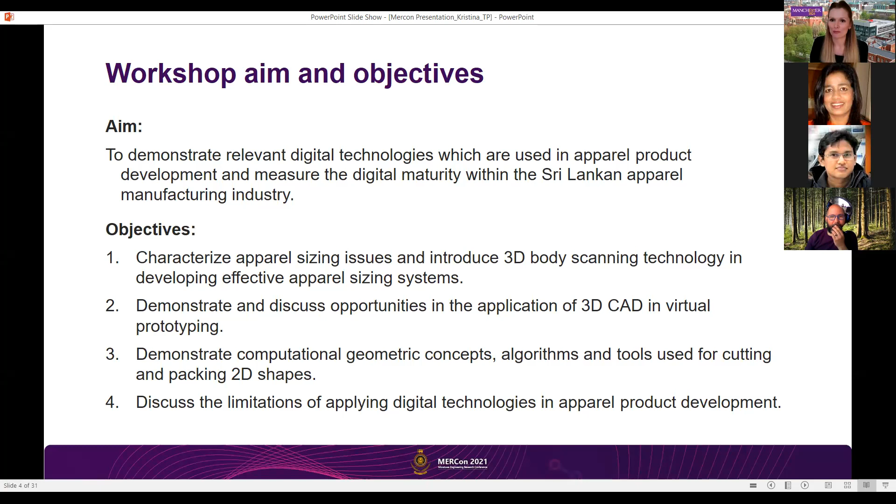So looking at the sizing and body scan, prototyping to be covered by Jayamali, and then also the computational geometric concepts, algorithms and tools for cutting and packing, which is based on Dr. Ranga's research. And finally, the limitations and the opportunities that I'll be looking at.

So as I said, this is a workshop. We don't just want to talk at you, we want to get your input as well. So we'll be using Turning Point throughout this workshop to run some polls and get some ideas from you. So if you'd like to take a moment, I will actually put this in the chat now as well. So you can either access it via your mobile or a browser, and then type in the session ID, which is MERcon 21. So there's no need to create an account, and your responses will be anonymous. So if you'd like to join the session now, then we can maybe start our first question to just make sure that the poll actually works, and to get to know who's joined us today here in the session.

So if you've managed to join the site, so the session ID is MERcon 21, and I've got it on here again, the website. So you should be able to see on your device now this question popping up. So if you just could tell us who you are. Are you an undergraduate or postgraduate taught student, a research student, academic, or professional from the apparel or textile industry, or maybe from a different industry? If you could just pop in your response now, that would be great. If you've got any problems with accessing the poll tool, let me know.

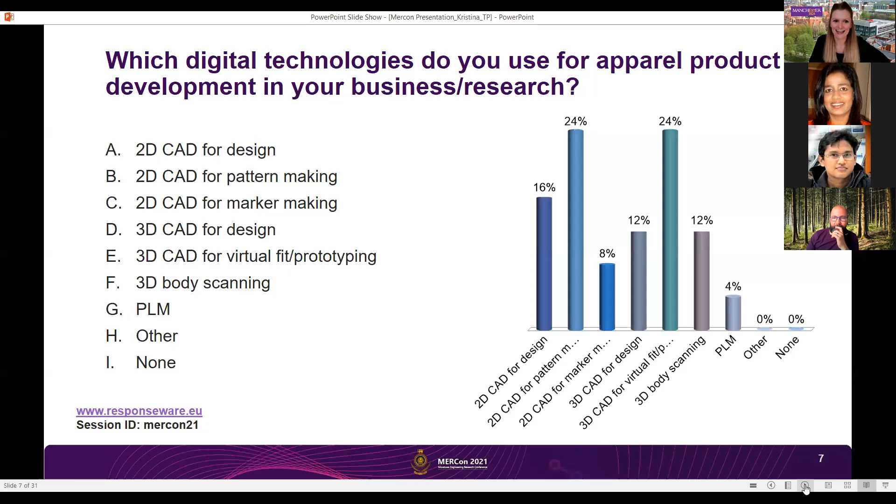So we've got B's and C's quite a lot, which means 2D CAD for pattern making and 2D CAD for marker making is used quite a lot. But let's see what we've got on the poll. Okay, yeah, so we've got 2D CAD for pattern making and 3D CAD for virtual fit and prototyping. That's great, because we'll be covering that today, and especially Jayamali will obviously be covering the 3D CAD for virtual fit and prototyping. So that'll be interesting to hear your thoughts on that as well. Okay, that's great for a start. Good to have a bit of information about you and your backgrounds.

And we've got a final question here, which is, what is the greatest benefit of the digital technologies that you apply in your business? What would that be? You can type that into the app or into the poll if you've joined the poll.

We have a couple of responses in the chat as well. So it reduces the lead time, customer satisfaction, time saving, avoid sample making time, reduce time consuming, reduce lead time, cost, but yeah, it's lead time and cost. Okay. So it's a lot about time saving, yeah.

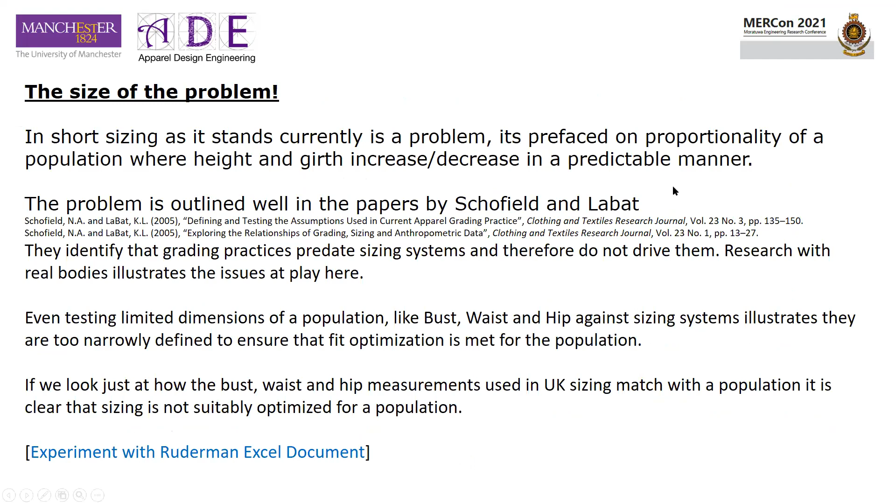So in terms of technology, which we're here to talk about, harnessing technology to better develop body-worn products requires we lead the current practice to a state where it can be adopted and integrated. So what we see is lots of promise with technology, but then often quite difficult problems with actually engaging it. Sorry, I think I've moved forward a slide. There we go. And that's quite important, to try and find a way for people to engage in it effectively.

So in the past 50 years, we've kind of moved from individual production skills to mass manufacture, centralized skills in making body-worn products. And what that means is that lots of what used to be home-based skills and skills that were distributed through a population are now largely concentrated in the hands of a limited number of people making stuff. And I think that then brings with it certain problems, not least of all with access to technology. But technology does offer us a lot, ways to center the body in product development, access not afforded to those who would most benefit. So I think that's quite important, which is that we have this technology, but it's often very expensive and quite difficult.

And something we've done with apparel design engineering is try and reach out to people and allow them opportunities to access technology in a way that means they can have some connection with it. So as educators, we bridge the gap, but it requires more accessible means to engage the wider maker community, to embed skills and develop more suitable theories, to support the practice of making clothing. So we need some way of inverting it so that everybody has an opportunity to engage in some way with technology. And we see that a little bit more with some of the developments, mobile scanning, some of the applications that are coming are much more centered on greater accessibility for people, although there's a cost difficulty for people. But importantly, within the context of all of this, interdisciplinary work is essential for us to drive anything forward and for us to get any benefit from technology as well.

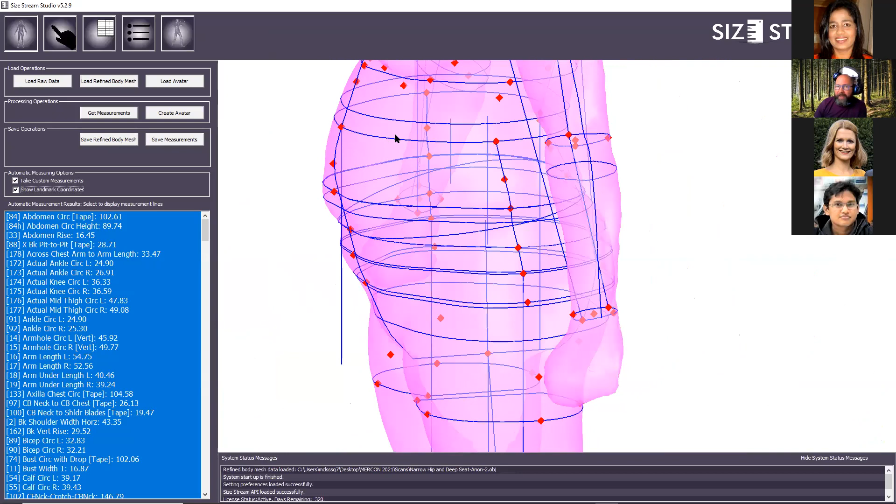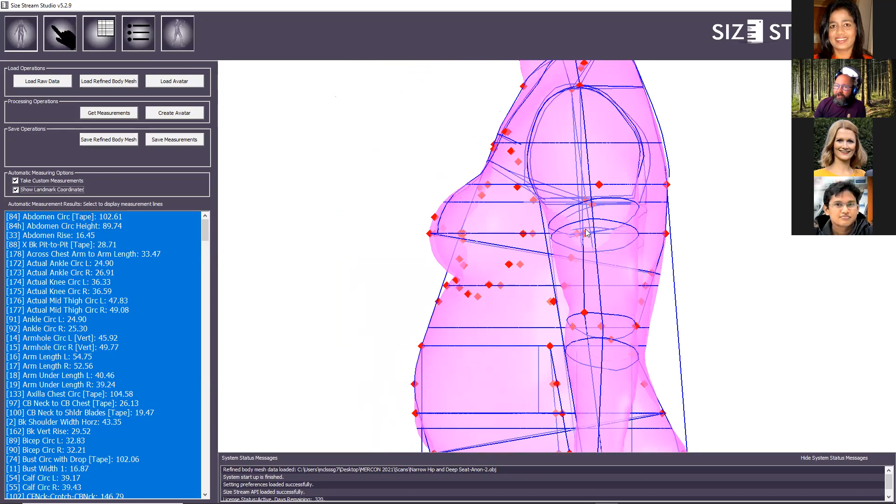So one of the things scanning technology will do is it lets us say, here's a circumference of the body. This is the waist circumference up here where my mouse cursor is. But it divides it. The scanner's saying this is a point that divides the arc of the front and the back. So what scanning does is it brings forward the time when we take a full dimension and distribute it. And similarly with the bust measurement, it says at the underarm point, this is the front arc of the bust and this is the back arc of the bust. And it lets us understand those things.

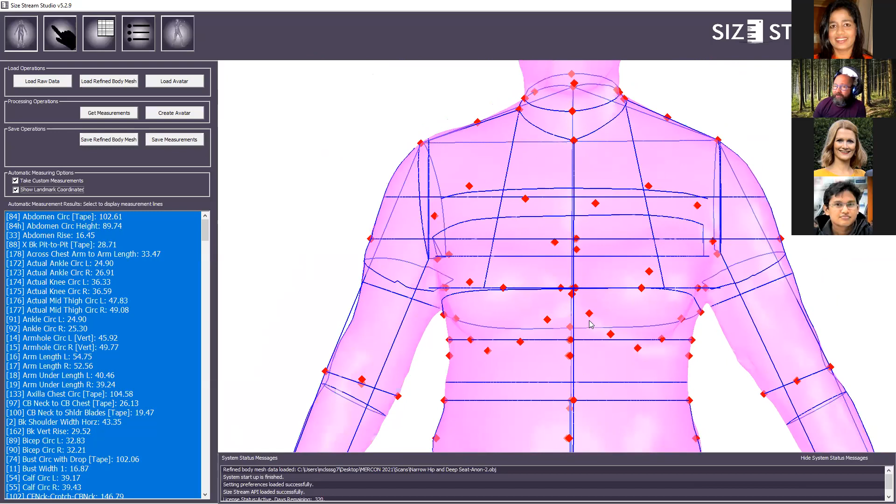But it also lets us look at depths through the body. And it's quite important. So we can look at the seat depth, the depth from the front to the back of the body at the area where, say, trousers fit. But we can also look at widths as well. And when you think about the process of manually taking measurements, it has huge advantages using scanning technology because we can extract so much more information, more than we ever could. But we need to start to understand the scan differently.

So if we look at this scan here, you can see there's a couple of points that represent the side neck. So I'm just going to make an adjustment as an illustration of some of the skills building you need to do with the software and some of the stuff we have to do with it as well. So I'm going to move the landmark for the side neck, largely because I want it to be in a position which I think is more appropriate. I think this is a little too far back.

When we're looking at the side neck, we're looking at a point where the trapezius muscle, this muscle at the top of your shoulder, comes into the column of the neck, and just forward of that intersects with sternocleidomastoid muscles, which run down the side of the neck into the top of the rib cage. But they create an angular change, but there are some quite important styling elements of this.

So when we look at it, we know that if this is the shoulder point, then we want a gradual slope back. So we know this side neck point probably wants to be about here from the perspective of a garment, but also from the perspective of the musculature of the body and what forms the side neck and creates this change. So we can actually move it in this environment, but we're having to develop a new skill of looking at this 3D body surface and then saying, well, what and where should these points be?

And we can move both the left and the right neck points to positions we think are more suitable, and then we can store and process. So apart from the fact I can't change the physicality of this body in this environment, I can change how I analyze it, and I can take more measurements and different measurements. So scanning opens up this possibility to really explore bodies in a much more effective way.

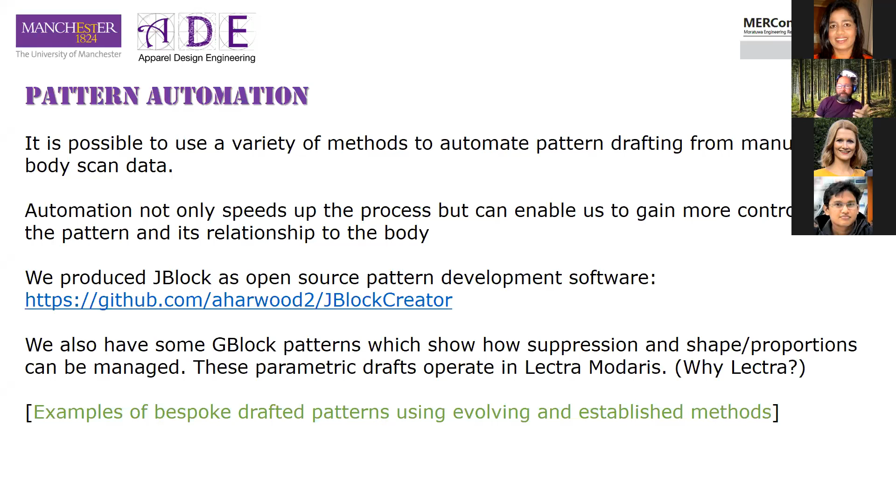We don't need to develop things specifically for an endpoint. We can utilize things that exist. And I think that's incredibly important to make technology work. Let's leverage what's there before we look to develop things to replace it. So in the context of pattern automation, I looked at two individual people for this. It's about 3 hours work getting here. So I have two people here.

One of them has a narrow hip side to side, but a deep seat front to back. And the other has a wide hip side to side relatively, but a shallow seat front to back. Key in these two individuals is they have a very similar circumferential measurement of the hip. One of them measures 101 centimeters, one of them measures 103. In the context of sizing, they're the same hip size for all intents and purposes of how sizing operates. But we can use pattern automation to create a block for them.

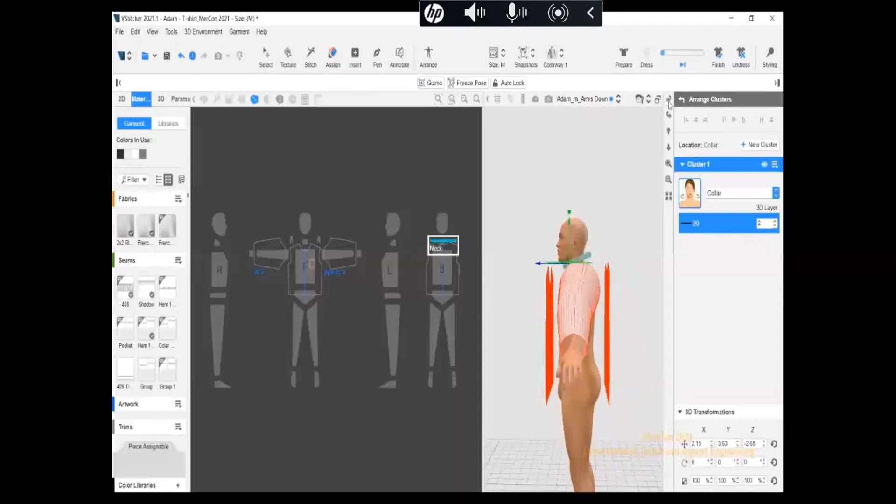Then use the main toolbar to switch to stitch the garments to the required assembly construction. Let's start stitching. We can stitch the shoulder seam and then the side seam to the side seam. The other side is automatically stitched because these pattern pieces are symmetrical.

Then let's stitch the underarm sleeve and use the multi-stitch feature to stitch the armhole and the neckline curve. Start stitching the front and back of the t-shirt to the armhole curve, then press done. Then let's start stitching the neckband using the multi-stitch feature.

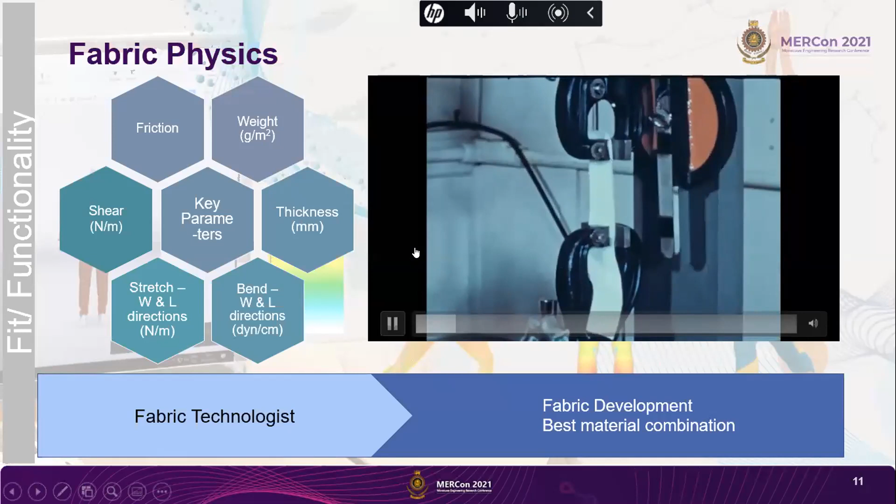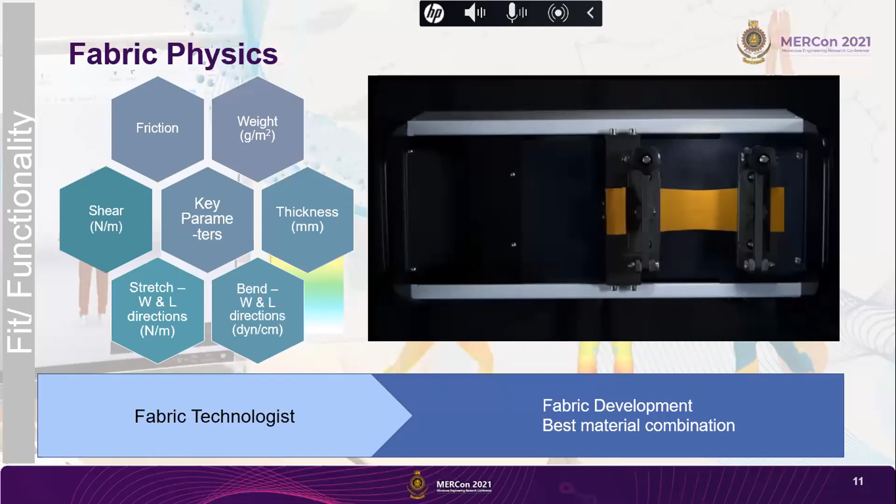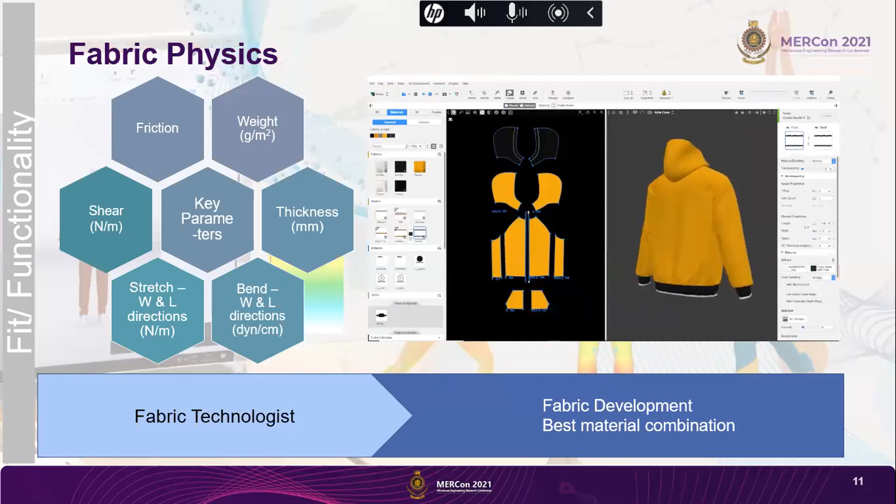We're saying goodbye to manual fabric analysis and complicated data entry, and hello to the digital age with the Fabric Analyzer by Browzwear. The Fabric Analyzer identifies the thickness, stretch, and bend properties of any fabric for visualizing garments. Simply place your fabric on the machine and retrieve the data as you work. Once analyzed, the property values can be automatically loaded into 3D software programs like V-Stitcher for true-to-life 3D simulation of any pattern with any fabric. For more information or to schedule a demo, visit us online at browzwear.com.

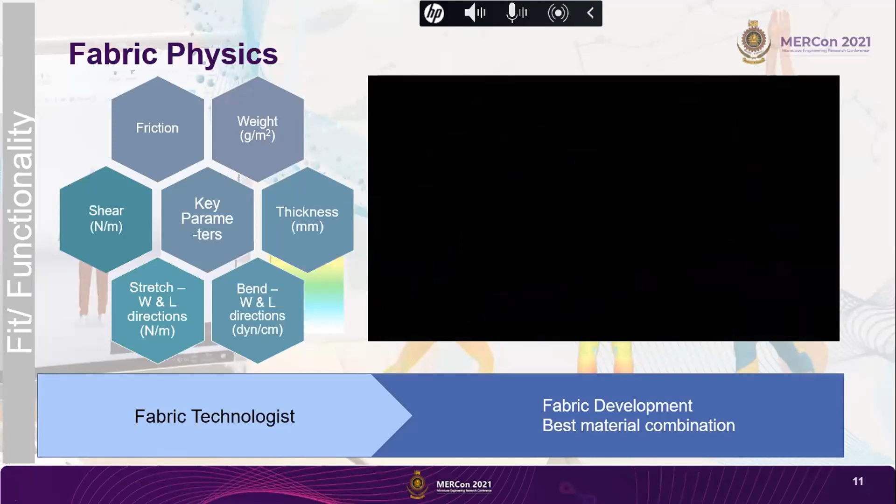Let's discuss these fabric parameters one by one using the next slide. Mass of the material: the mass of the fabric measured in grams per square meter. If we have the fabric analyzer tool, then we can directly import these measurements to the 3D CAD system, or else we have the fabric library inbuilt with the 3D CAD tool, so we can get those materials from the 3D software.

Coefficient of friction measures the amount the fabric resists sliding on the avatar. The lower that value, the easier it is for the fabric to slide on the virtual avatar. The higher the value, the more the fabric will hold its position. We need to know these parameters when we do sportswear manufacturing, for the bottom band and the shoulder straps and all. When we map the real material characteristics, we have to have an accurate idea of these fabric parameters.

Let's see the thickness of the fabric in millimeters; we're supposed to input it here. Then the bending rigidity, that means the stiffness of the material, measured in dynes per centimeter along with the width and the length. The lower the value, the less stiff the material. The higher the value, the less the fabric bends.

For example, in the apparel clothing industry, we use materials like leather, and some denims are more stiff materials. It has thousands of value when we consider bending rigidity. Then the tensile stiffness, or we call it stretch of the fabric, measured in newtons per meter.

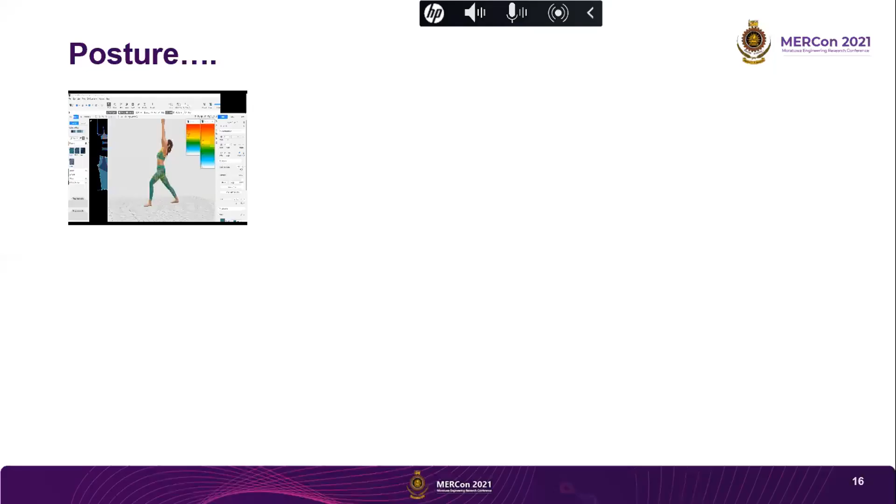This information is needed for pattern technologists, because if they are more focused on compression clothing, sportswear, and foundation garments manufacturing, they need to know this - this information is very useful to pattern engineers.

So they should have an understanding of biomechanics. When they do sports clothing, they need to select the correct size of avatar to be compatible with the pattern pieces, apply accurate ease allowance, and grade the patterns correctly for the correct sizes.

Here I will show you how, after we simulate with the correct material properties and correct trims, accessories, and placements, finally we can have the animation to assess the functionality of the garment. Let me run this animation as well.

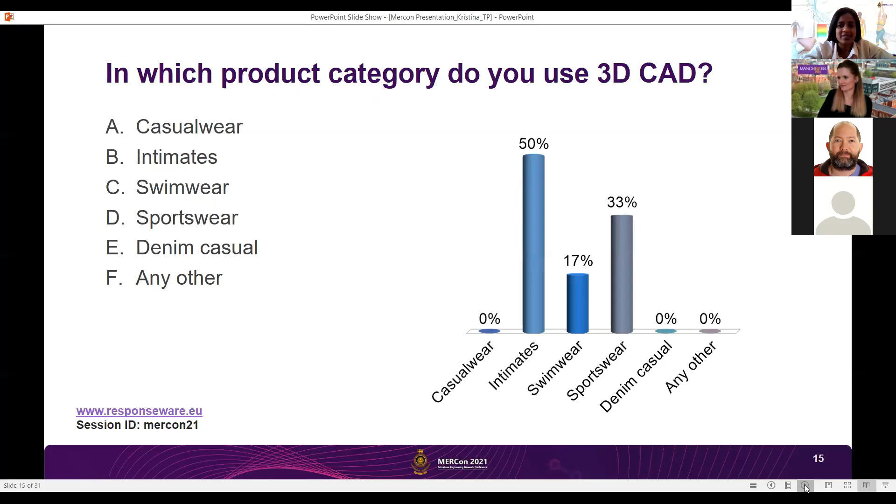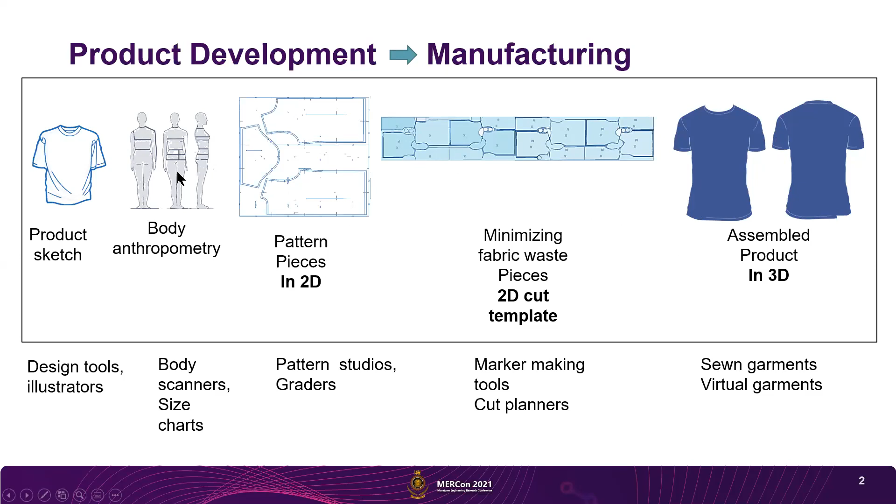When it comes to garment assembly, the major input will be the cut panels, and you need to cut those panels from the fabric stock sheets you have. So this is what you basically see. In the scope of my talk, I'll be touching on the pattern pieces area, as well as developing the cut template layouts to have the panel pieces. Those are the 2 areas that I'll be focusing on.

If you look at a high level of the process within this scope, this is what manufacturers see. For the pattern pieces, they see them through pattern engineering software. And for the cut plan or cut layouts, they see them through cut plan optimizers, or maybe waste minimizing optimizers.

If we go one layer down, or in other words a little bit in detail, from the developer's perspective of these different tools, they see these things as digitizing and visualizing irregular shape polygons. These pattern pieces, they see them as irregular shape polygons. And for cut plan optimization, they see those things as mathematical models of optimizing cut layouts, or optimizing the resources. That's what you see in one layer.

When we go down another layer, from a mathematician's or computer scientist's view, they look at this as the application of computational geometry, or it could be computer vision. And on the other side, in the manufacturing part, it's all about the application of cutting and packing algorithms. Usually we call them cutting and packing heuristics.

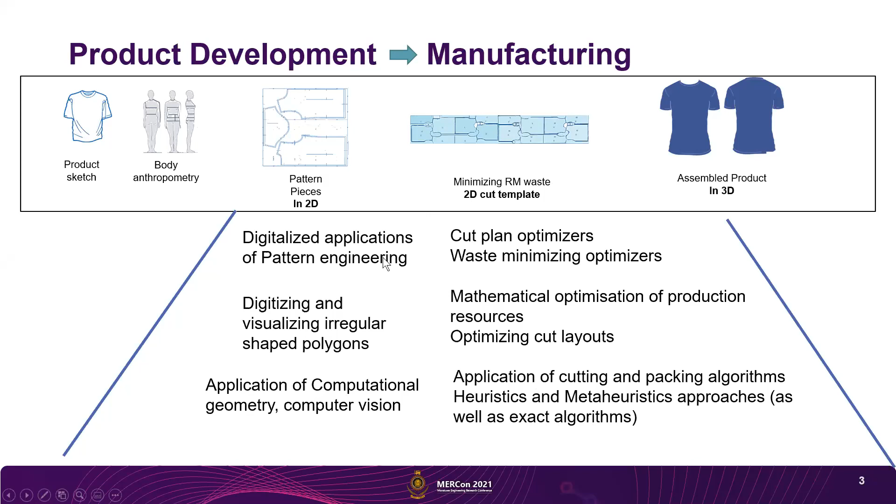And you can see that some meta-heuristic approaches are there, or also some exact algorithms such as mixed integer programming approaches. So that's what you see when you are working in the core part of these different applications. So having that introduction, I am moving to the outline of today's talk.

So then we will have a discussion about generating 2D cut templates. And then we will discuss the background concepts behind these 2D cut templates. So I'll be focusing more on the computational geometric concepts applied in digitalized patterns and the visualization part of those patterns, because that's what you see in these digitalized applications. And finally, it's about how to optimize the cut template layout as well.

Because I usually use the word cut template layout. If you are from the apparel industry, we basically call them markers. So I'll be talking about how to optimize the markers and what are the different optimization approaches available to deal with these kinds of problems.

So in fact, in the process of generating an optimized cut template, these are the steps you probably follow. The first thing is, if you want to do it your own way, you need to think of how to feed your 2D patterns into a computer. And then you need to think of how to place those patterns in a cut template layout or on a marker. And then finally, you can think of how to optimize those placements in order to achieve a high utilization of fabric, or reduce the waste as much as possible.

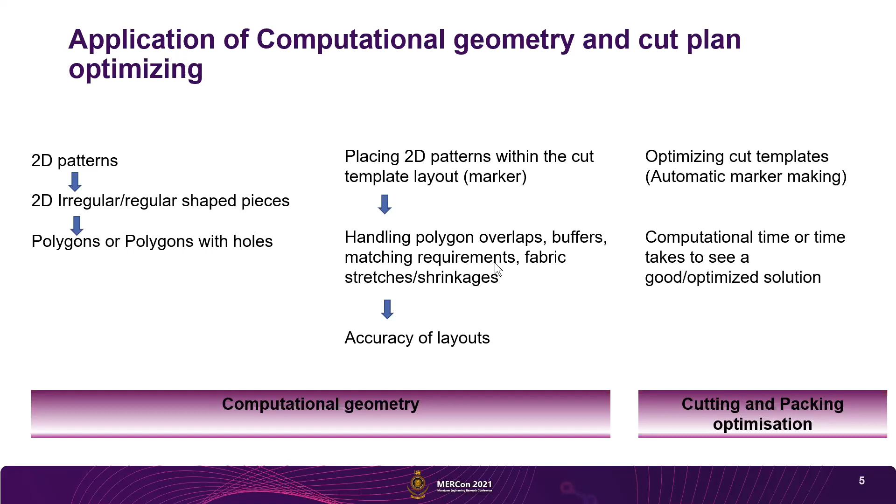So digitized packing is indeed challenging. We are talking about really irregular packing pieces. They can be either convex or non-convex polygons. And the other problem with garment packing is that we have to deal with a large number of vertices. It's not like dealing with a small number of polygons with a very small number of vertices, because we have really sharp curves. When you have curves, you have to allocate more vertices, and ultimately you have to deal with a very large number of vertices.

And then, depending on the material characteristics, you may think of rotating pieces, sometimes to a finite angle, like 180 degrees or sometimes 90 degrees, but if you are working with a really homogeneous material, then you can think of allowing pieces to be rotated freely as well.

So yes, indeed, in a large production environment, we have to deal with a higher number of pieces, and they are really heterogeneous in sizes and shapes. And then we have extra requirements like curved shapes, and on top of that, especially when it comes to intimate wear, we have really small pattern pieces and really sharp curves, where we need the exact shape as it is to get the required fit of the garment.

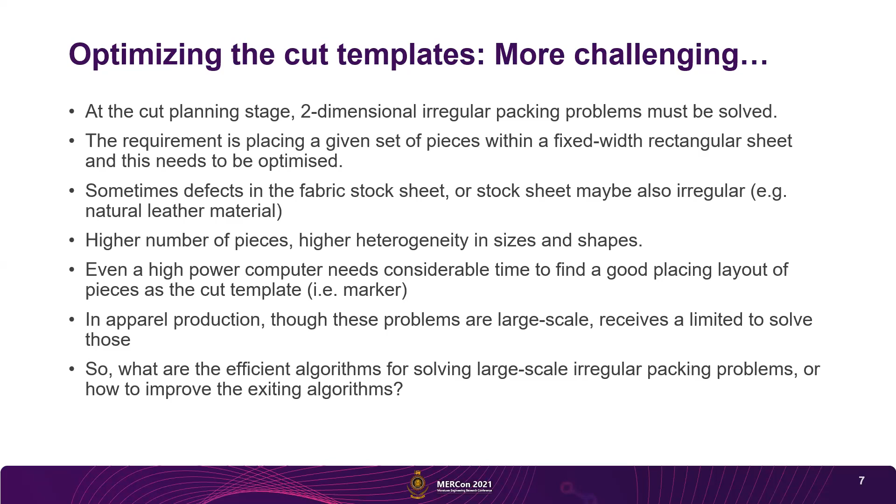And regarding this irregular shape packing problem, as the literature says, it's still a very hard problem to solve, and there are a lot of limitations from the computational time aspect. Usually, if you want to find an optimal solution for 5 complex pieces, sometimes it would take more than 6 hours if you are using exact mathematical models, like mixed integer programming models, because they are seeking the best out of best. That's how the nature goes.

So many commercial softwares struggle to reach these targets, and due to that reason they are heavily dependent on heuristic and meta-heuristic algorithms. If you look at almost all the commercial software available, they are heavily dependent on heuristics and meta-heuristic algorithms, which find good solutions, but not the best out of best.

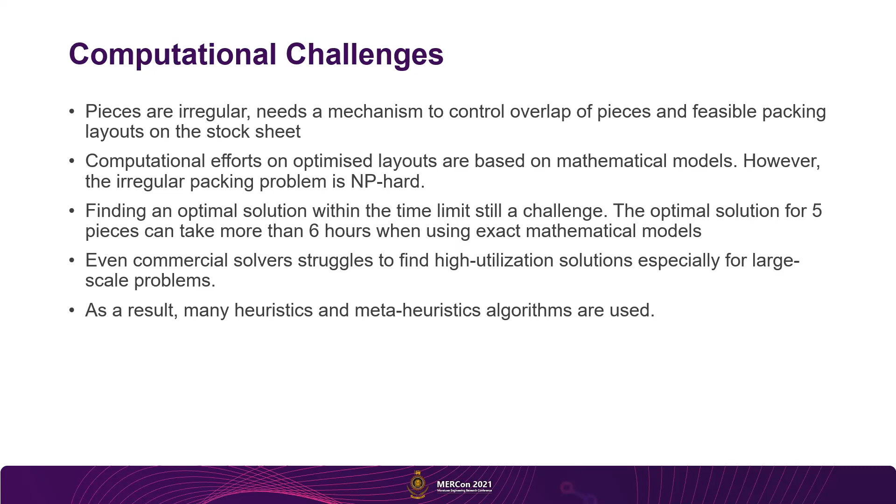Yes, so when it comes to the packing algorithm part, in terms of geometrical shapes, I will discuss all these things in detail in the next few slides. With the naked eye, you will sometimes easily understand whether two pieces are overlapped or touching in a cut template layout. But sometimes when you zoom in and enlarge it, you will find there could be some tiny overlap, or maybe some polygons are enclosed within another one. If that kind of thing happens, it will become a problem.

That's why these geometric programming constraints are really critical when you are dealing with this kind of problem. If you are a programmer or an optimizer, you need to pay attention to the geometric constraints of this problem. For example, I told you about piece buffers, piece rotations, sometimes pieces can be flipped, piece scaling, and handling the tolerances. It's really a critical task if you want to do programming in this particular area.

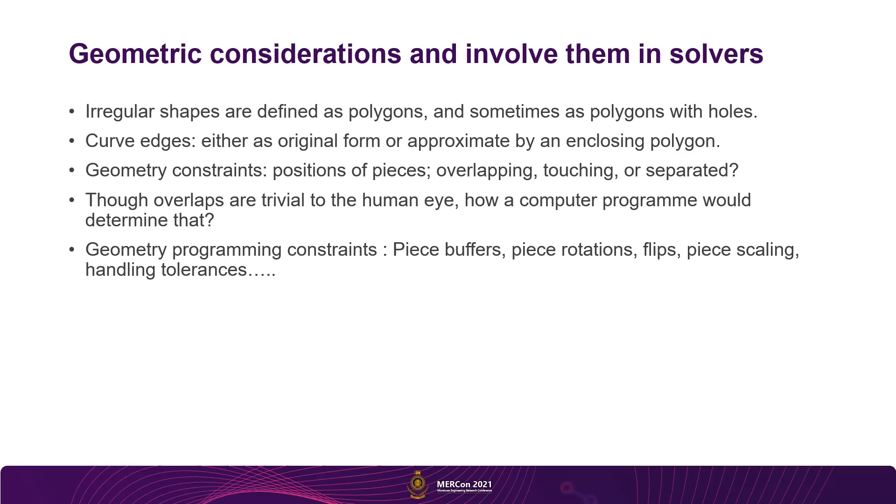Now I will discuss this part with some practical examples: if you really want to get into this task, where should you start, and what supporting aids do you have? Let me explain that a little. The first thing, if you want to develop a cut template layout, is to think in a programming aspect. You have to think of how to represent your pieces, because you have irregular pieces. You can represent them in a computer using discretized methods or non-discretized methods.

So one common discretized method is the pixel raster method. They are really simple to code if you want to represent your pieces like this, so it's very simple to code, and the algorithms are fast, but they will be really memory intensive. And the other thing is that they cannot exactly represent the non-orthogonal edges in the piece.

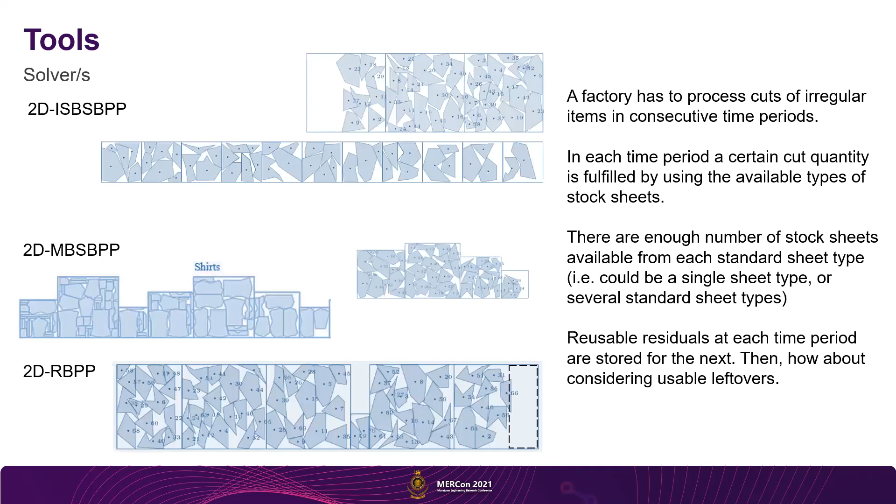And a lot of parallel algorithms are going on. And also, the other thing I want to emphasize when it comes to 3D shape or the virtual garment arena: if you are a fan of this CGAL library, yes, Boost will highly cater to the 2D shape patterns. But if you are a fan of CGAL, then you can work with 3D as well. So it's not about polygons only.

It's about dealing with the shapes, dealing with meshes, dealing with arrays of points applied in the 3D arena. And you can think of different libraries available by applying simple coding, like matching curves to curves. So if you went to Dr. Jayamali's session, she was stitching in the virtual environment, trying to connect two pattern pieces together in a 3D environment.

So what's going on behind that from the computational science point of view? If you have a look at this area, I am pretty sure you will get some understanding of how things are going on. So with that note, I would like to hand the control to Kristina. Thank you.

Yeah, thank you very much, Ranga. That was very interesting, very insightful. If you've got any questions, you can put them in the chat and I'm sure Ranga can respond to them in the chat. I'm conscious of time and we've officially run over as expected, because there's just so much interesting stuff to cover in this workshop today. Yeah, thank you so much, Ranga.

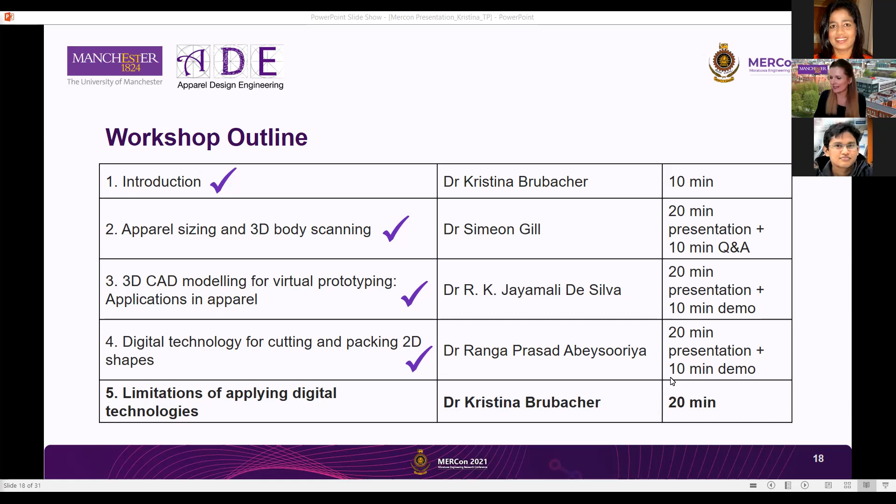And that brings us to the final part of our workshop, which is about limitations of applying digital technologies. I'm conscious that we've run over time, so I will try to keep it brief, but I'd really like to get some of your input in this last part as well. So hopefully you can stay with us for a bit longer. We'll try to wrap up. Limitations of applying digital technologies in apparel product development.

So we've seen different technologies. We've looked at body scanning, automated pattern development, 3D CAD for virtual fitting and prototyping, and also marker making and cutting technologies. And I want to look at some of the limitations. But before we do that, I want to have a look at the promise. They're making all of these promises, and for example here we've got Browzwear saying that they're enabling apparel companies to digitally transform their business. They're promising true to life garment prototyping, accurate fabric draping.

Then we've got Lectra here promising a 30% increase in pattern development speed, speedy approval, efficient pattern grading. So a lot related to speed. And I guess that links back to some of the benefits you identified in the introduction about 2 hours ago, when you said what the key benefit is for you in using technology. You highlighted speed there as well, and efficiencies, which Lectra is picking up on here.

And then we've got Optitex, and they promise end-to-end digital solutions for fashion and apparel businesses, and a 60% faster workflow compared to traditional supply chains. So yeah, that's quite interesting. Speed and efficiency seems to be the case, because that's what you have all identified as a benefit. However, I have a question mark against these claims of true to life garment prototyping and fitting and fabric draping. I'll be talking about my own experience from my research, where I came across some of the limitations in 3D CAD.

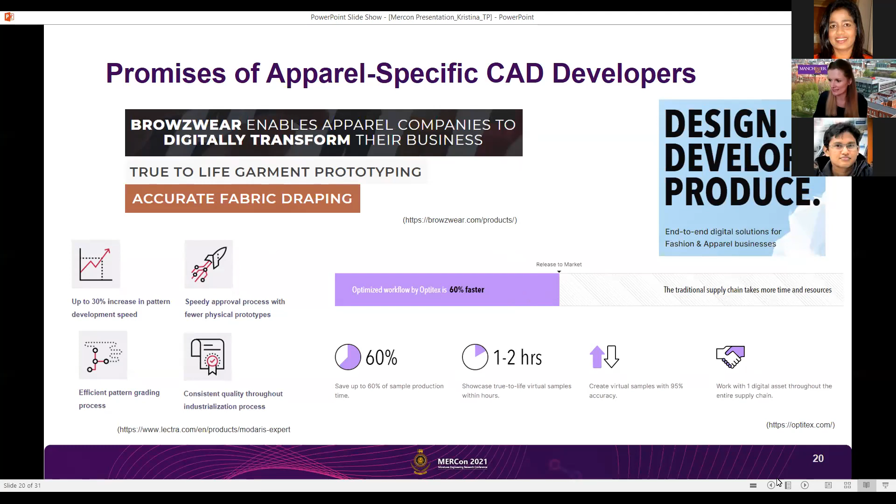But first of all, I'd like to ask you, going back to the poll again, what are the biggest barriers to the adoption of digital technologies for apparel product development in apparel businesses? I can share the link again in the chat if you're no longer logged on to the session, or you can respond in the chat as well. A, resistance to change, B, shortcomings of technology, C, system compatibility issues, D, skills shortage, and E, difficulty to integrate into current processes or supply chains.

Interesting, we've got some responses here in the chat saying all of them. Yeah, so obviously there are still quite a lot of barriers there, because when we think about these promises we've just looked at by the CAD companies, you'd be thinking, why don't fashion companies actually employ all of these technologies?

At the moment we don't really know what the adoption is of digital technologies within the global fashion industry. If you're looking at it from a global perspective, here in Sri Lanka there's quite a high level of adoption, but I would argue that an end-to-end solution of digital technologies and digital transformation is probably not commonplace in the apparel industry at the moment. Looking at all the promises and efficiency gains, you'd think, why is that not the case? But we've identified some barriers, and a lot of you said all of these would be barriers for businesses.

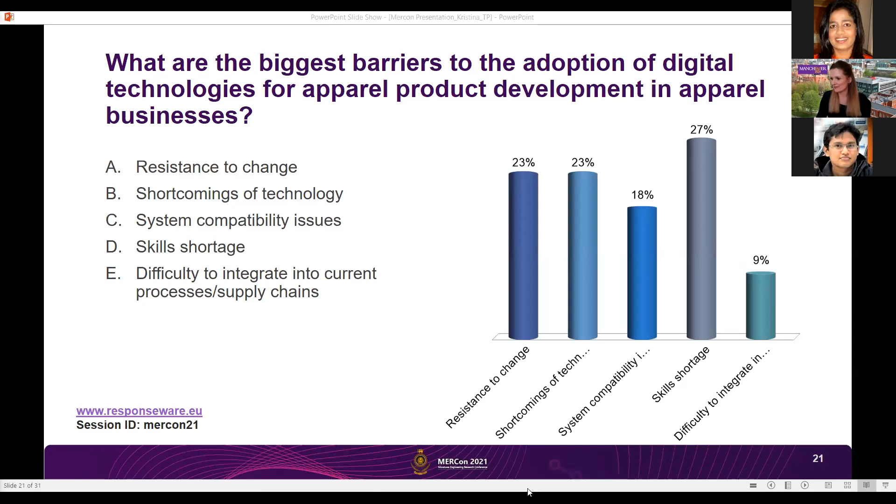I won't go into too much detail, but basically what we looked at was whether we could use an existing clothing-specific 3D CAD software, in this case Optitex, to predict pressures applied by compression garments. The idea was to use 3D CAD for new product development, because new product development requires prediction, whereas if you're just trying to replicate something that already exists, that's basically just creating a copy of reality, but that's not what we wanted to do. We wanted to actually predict something before making a prototype.

So we conducted in vivo wearer trials with participants wearing sports compression garments, took body scans of the participants, measured the pressure the garments apply to the bodies, and then digitized the patterns and imported the body scan avatars into Optitex. Then we created simulations and used the pressure map that Jayamali mentioned in her presentation to compare the pressure values. The short answer is it cannot be used to predict pressure, but that's not what I came to talk about today. What I want to focus on is the different limitations I came across when trying to create a simulation of compression garments.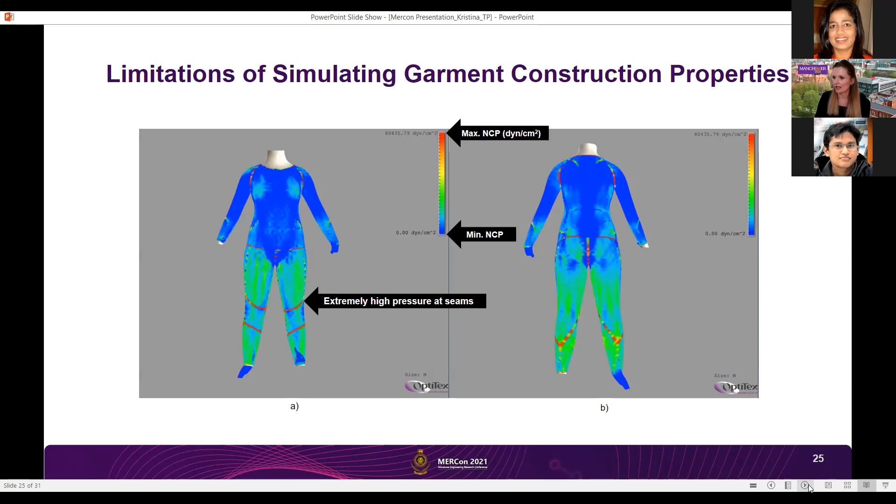Then, of course, the key limitation is that we're simulating fabrics. Simulating fabrics is very difficult anyway because of the anisotropic characteristics of fabrics, and that's why the simulation of clothing and virtual fit lags behind other industries.

Other industries use hard, solid materials. But fabric also needs to be simulated in combination with the body, so there are geometric contacts between the fabric and the body, and that's really difficult to simulate.

As we found in our study, in terms of the pressure maps we can see here of different participants, they did not directly link to the actual in vivo pressures that we measured in these participants.

And then there are also limitations when the fit is not 100% right. As Simeon has mentioned, there is a big issue with sizing, and we found the same with compression garments. It was very difficult to find a well-fitting item for our participants, and in many cases the problem was the length of the garments, so the sleeves and the legs were too long.